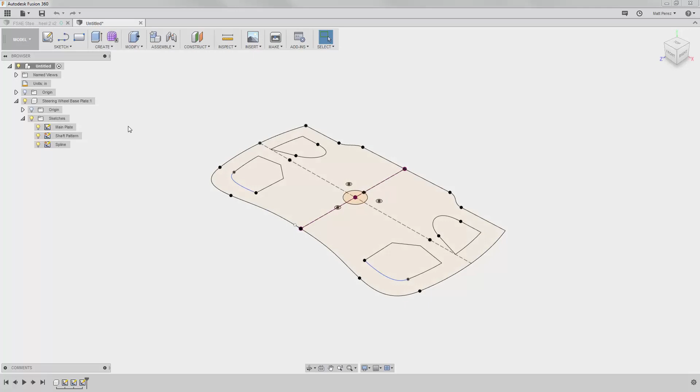First, we want to go to New Design from File, navigate to your Fusion Mastery Lesson 19 dataset folder, and select FSAE Steering Wheel 2. This is going to contain our component, as well as the sketches for main plate, shaft pattern, and one called spline. The first thing that we want to do is activate this component.

We then are going to hide the spline and hide the shaft pattern sketches. This leaves only the main plate sketch active and visible. Next, we want to go to our Create dropdown and select Extrude. Also note that Extrude has a shortcut key E. We can also hit S on the keyboard and Extrude will be on here by default.

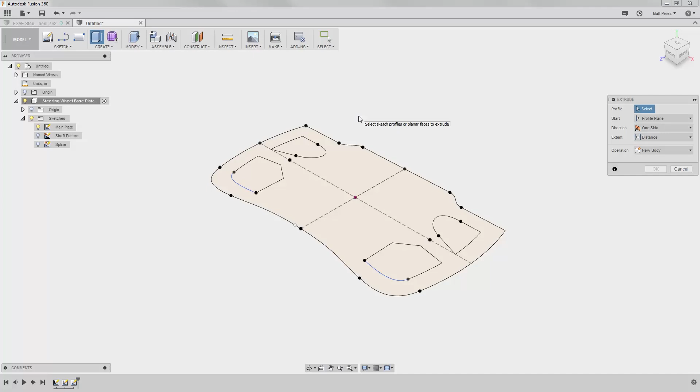And we can use our right-click menu to navigate to Create and select Extrude. Any of these options are going to be valid. It just depends on how you want to access your tools. As we move forward in our course, I'll start making less notes about accessing tools and simply tell you which tools to get. In this case, the profile that we want is going to be our main plate sketch.

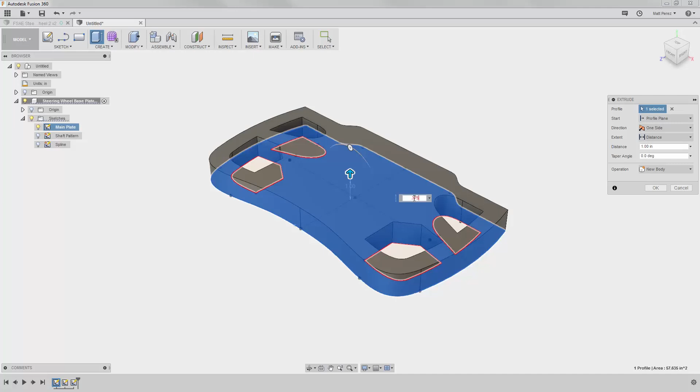Note that these four areas are left open. On the screen, we're then going to select and hold down the left mouse button on this arrow and pull it up. Once we pull it up, notice that the dimension is highlighted here. We're going to hit 0.375, and this brings us back to a 3/8 thick plate.

Let's take a look at some of the various options. We can change where the sketch is going to start the extrude, in this case the profile plane, but you can also offset it or select from another object. In our case, we don't have any additional objects. It makes sense to start from the profile plane. We can also dictate whether or not we want to extrude one direction, two directions, or symmetric in both.

We can determine whether or not we want to manually enter a value for distance, select another object to extrude to, or through all, which will take it through every object. The distance and taper amount, and then the operation type. In our case, we want to select a new body because we already have an active component. It'll place the body within the active component. If you're starting on a new file, you can also create a new component on the fly.

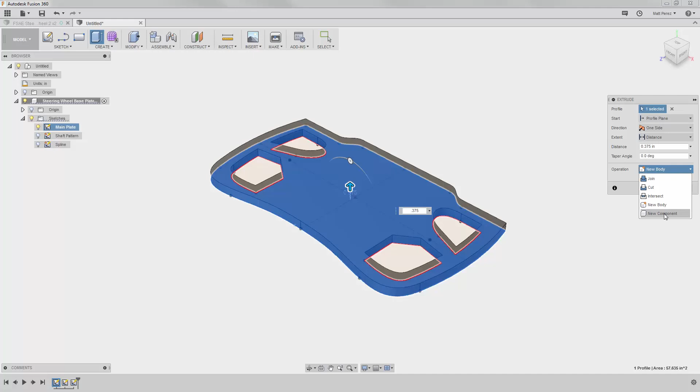Go ahead and select OK. And now we've made our solid extrude. And notice that by default, the main plate sketch is now hidden. We can turn it back on at any point in time if we need it for additional operations, but we're going to go ahead and leave it off.

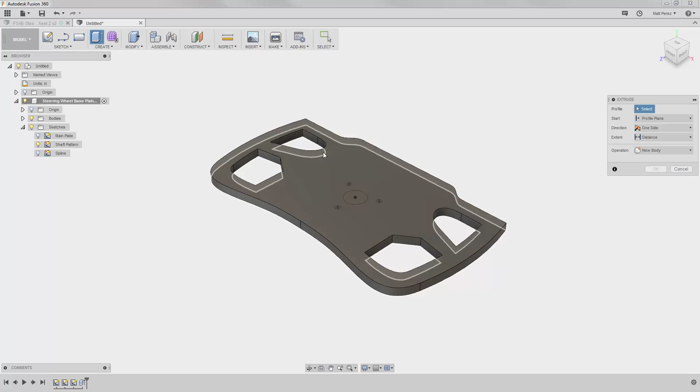The next thing that we want to do is extrude the shaft pattern. One thing you'll note is that sometimes selecting through solid geometry can be tough. So let's first select Extrude, and note that as we try to select these, it's trying to select the top face. All the way on the right-hand side of our toolbar, we have a Select option, and notice that we have selection filters all the way at the bottom.

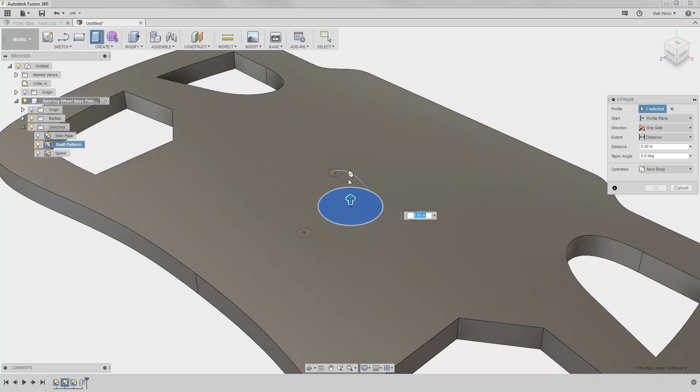We can dictate whether or not we want to select just sketches, and that will allow us to focus on just these sketch profiles. In this case, of course, we could also just rotate the model over and select them from the bottom. From here, I'm going to hold down the left mouse button on this arrow and pull it up. By default, the preview will show red because it's cutting solid geometry away.

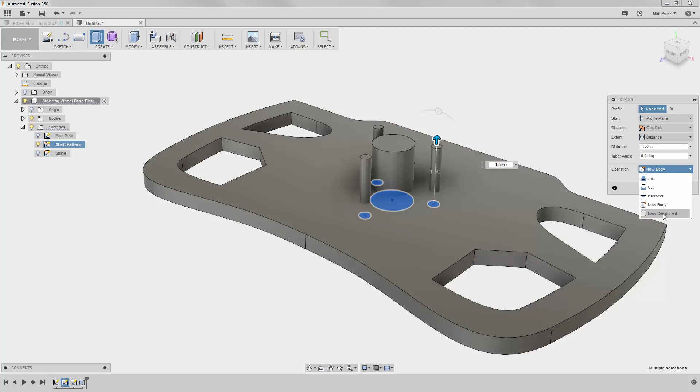We could also make it join to create solid, create new bodies for each of these instances, or even a new component. If we select intersect, the resulting body left will be everywhere that this sketch extrude intersects the original. In our case, we actually want to cut. For our distance, we're going to select through all and say OK. Let's go ahead and activate the top level, and let's save our file as FSAE Steering Wheel 3.

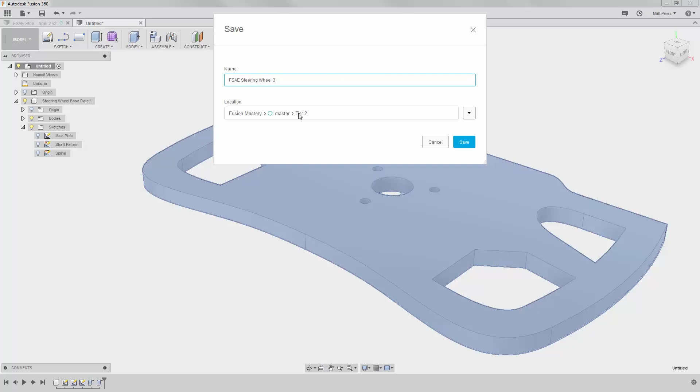I do want to make a quick note about versions and the differences between how we handled FSAE Steering Wheel 2 and 3. When we started a new design from file with FSAE 3, we didn't save it initially, we simply started modeling. With FSAE 2, we saved it first and then started creating our sketches. The difference here, if we expand our data panel, is that FSAE 2 has 2 versions, while FSAE 3 only has 1.

It's a good idea whenever you start a new model, whether it's from a file or starting by uploading a model, to save the initial version before you get started making any changes. That way you can always go back to the original.

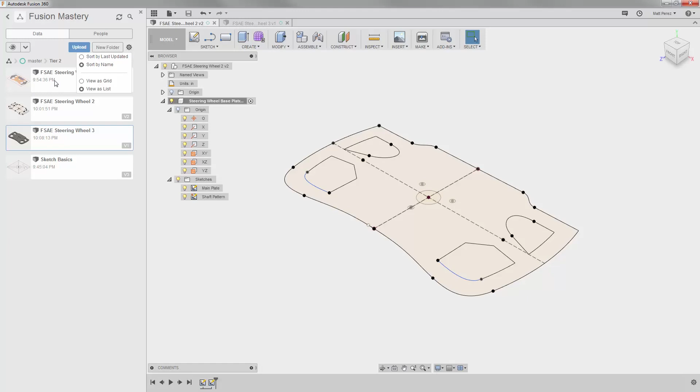Another quick note, the gear icon in the data panel will allow us to change the view to set it as a list. Because we're going to be creating multiple files with the same initial file name, FSAE steering wheel, this will help us figure out which version we're looking at. We can also determine whether it's sorted by updated, type, or name. For right now, I'm going to sort by name, but later on we might change it to last updated so that the most current version is all the way at the top. Let's go ahead and close our data panel for now and move on to the next steps.